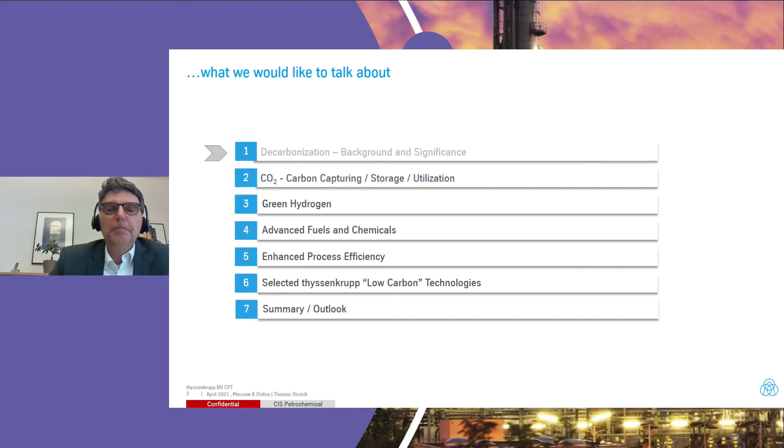If we look at the word decarbonization, there are a lot of keywords. There are many subject areas, but also a lot of different interpretations - synthetic fuels, carbon utilization, green hydrogen, green CO2, green components. There's a lot of interpretation, and I will try to make it somewhat clearer here.

If we look at the scientific facts, there are greenhouse gases like CH4, CO2, halogens, and nitrogen oxides. The heart of the issue is that the emissions plus the heat trapped in the atmosphere lead to global warming. On the right is a pie diagram of global CO2 emissions, showing that Russia and Germany are at least in the same range for emissions, while the biggest global emissions come from China and the US.

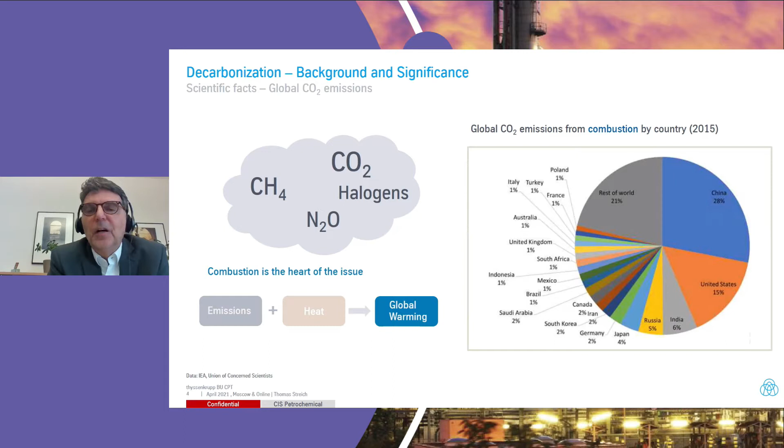If we look at the sources of greenhouse gases in Europe, the most part of emissions comes from fuel combustion - everywhere we have combustion of fuel, we have a lot of emissions. This is without the transport sector, where we also always have combustion. The transport sector is a quarter of greenhouse gas emissions, and the remaining part is agriculture, industries, and waste management.

If we focus on the transport sector, which is a quarter of greenhouse gas emissions, we see that the most part comes from passenger cars, and the remaining part comes from aviation, shipping, and rail industries.

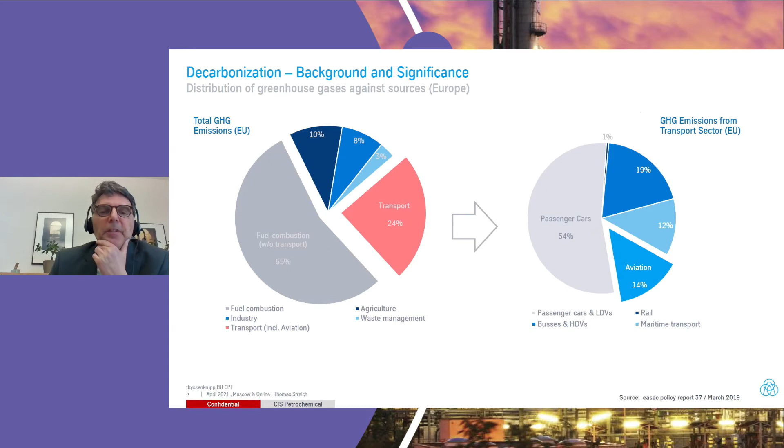If we look at the dilemma between the need to reduce carbon and the global energy demand, we see there is a dual challenge. Looking at the graphic, from 2016 to 2040 we will have a decrease in power needed, a decrease in building heating because of better buildings, and a decrease for passenger vehicles. But we will have an increase for road freight because of increasing transportation, an increase in aviation and shipping, and a significant increase for the petrochemical industry, especially plastics, plus a small part for others.

So in total we have an increase in energy demand, but at the same time we have to reduce carbon intensity or carbon emissions by more than 90%. If we do nothing, shown by the red line, we will increase greenhouse gas emissions, but we have the intention to follow the green line down to 2015 levels.

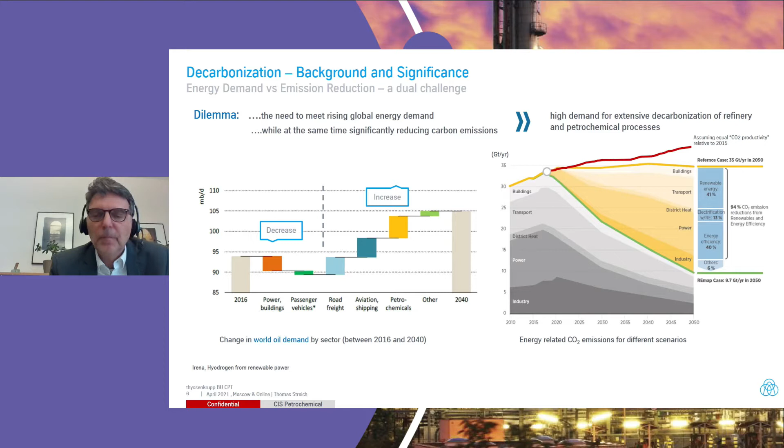If we try to understand the interaction between the refinery, the petrochemical, and the chemical areas, we can look at this simplified slide, though it's still complex enough. The refinery is represented by petroleum processing, which processes crude oil, and the petrochemical industry is represented by steam cracking. Most of the crude oil processed in the refinery goes to the transport sector and others - blending, lubricating, waxes, petroleum coke, as well as asphaltenes - and only a small amount, 15%, goes as intermediate products to the petrochemical industry.

In the next slide, this goes from the petrochemical to the chemical industry to produce the building blocks for the value chains - for example, ethylene and propylene, which can carry out all the respective products we have in the chemical industry.

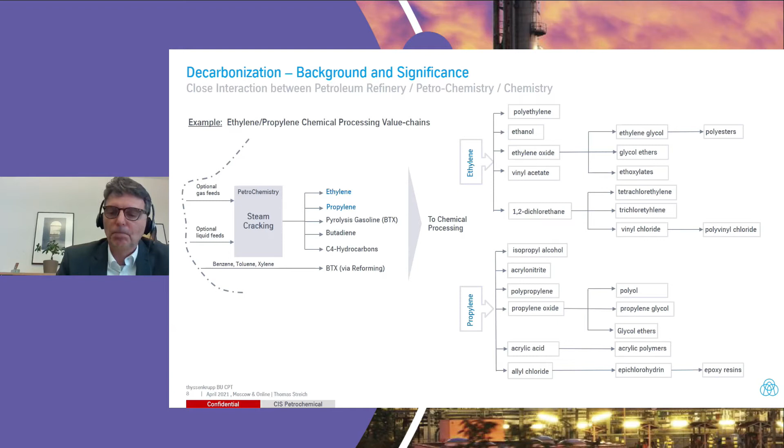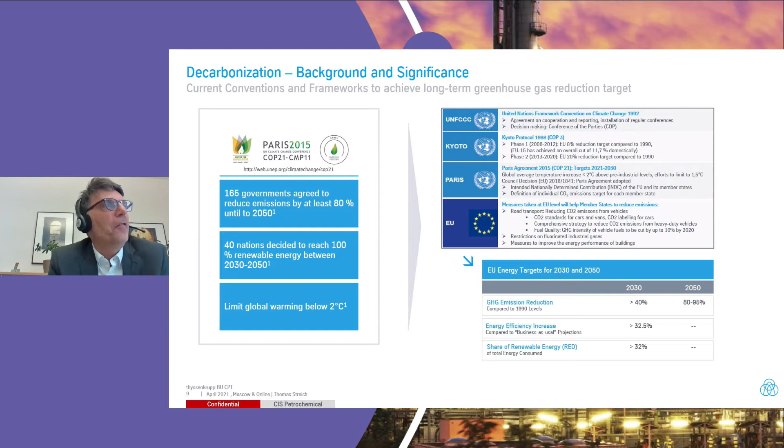What does this mean? There are a lot of regulations, which we heard about in the lecture just before. There's the Paris Agreement - I won't reflect on this in detail. We have some national regulations, and some further regulations, such as a plastic tax, which comes into force this year. All these regulations work as a kind of driver to decarbonize, to strengthen our efforts for a low carbon industry.

As we've seen from the slides before, it seems that oil and gas processing makes the beginning. But, and this is a very important point, is an ad hoc replacement feasible? If you look at the left picture on this slide, it's a very schematic picture of a refinery with products like fuel gas, LPG, gasoline, transport fuels, jet fuel, diesel fuel, and also light and heating oils, and residues like petcoke, bitumen, and sulfur.

For some of these products, there are lower greenhouse gas substitutes, derived in the table on the right. This means for transportation fuels, we are able to substitute electrical vehicles. We can use bio-based fuels, e-fuels, which I'll come to later. For fuel oils, we can directly use natural gas. For LPG, for building blocks, for chemistry, there are also substitutes which can replace fossil products.

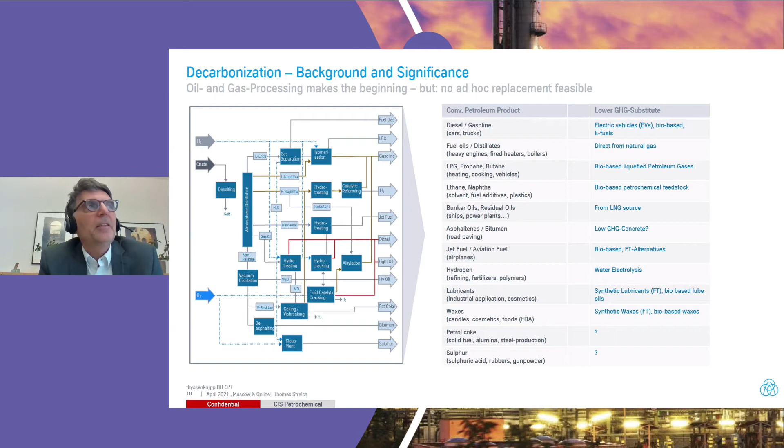But there are also a lot of components which are not easy to displace or replace with such lower greenhouse gas products. In such cases, we have to implement new pathways. We have to implement new interconnections between refinery, petrochemical, and chemical industry. That is what I want to focus on in the next slides.

Decarbonization, strictly speaking, is the wrong word, because we are not going to remove all the carbon. Carbon is needed for the chemical, for the refinery products - it's not going out without carbon. So we have to handle this carbon, and we have to handle it in a way that is sustainable.

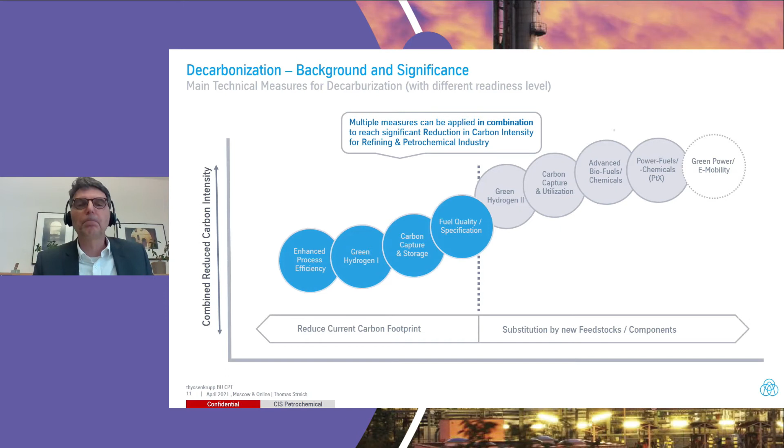Carbon capturing, CO2 - if we talk about CO2, we talk about a property, a component which has to be removed. But on the other side, carbon dioxide is a very valuable compound, and we should not abandon carbon. We should find the right balance between emissions, which cause global warming, and cases where we can use this carbon from emissions to make new products. So with this knowledge in hand, we have the targets for carbon capture and storage, and the target for carbon capture and utilization.

Capturing CO2 can be done from concentrated sources like industrial emissions, flue gases, which can be purified - this is much easier because they have high concentrations. It's much easier to remove CO2 from such sources. And we have direct air capture - not so easy because we have low concentration, and it's in any case very expensive today. But both capturing methods can be used for decarbonization.

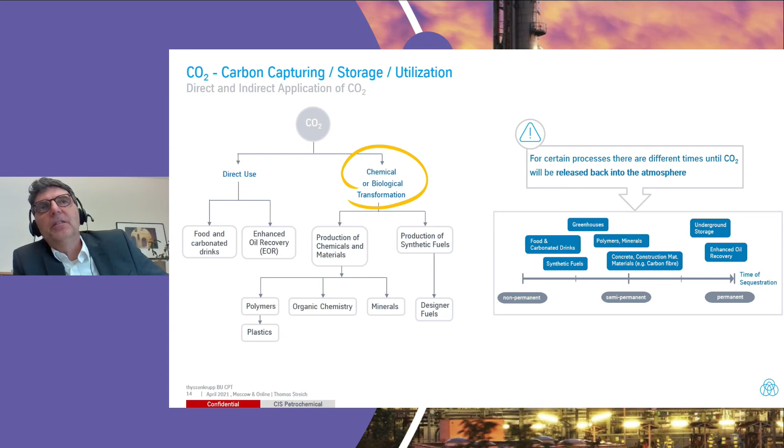If we look at synthetic fuels, where we use CO2 as part of the feedstock for producing synthetic fuels, we see that it's a very short time, because if this synthetic fuel is processed in an engine, an ICE engine, we will see a very short release back to the atmosphere. If we use polymers, minerals, or concrete making from CO2, that's a semi-permanent storage. And if we use underground storage, we have a relatively permanent storage. This is essential if we try to do life cycle analysis, and this should be mentioned in this kind of assessment.

Green hydrogen. Talking about hydrogen, hydrogen is a very important component within refinery and petrochemical. You see the industrial sectors: refining, chemical, and iron, steel, and other industries. For the refinery, a quarter, 25%, hydrogen is used for all the hydro treatments, hydro cracking units.

For the chemical industry, there's mainly polymers, ammonia, as well as the production of resins. And this is coming more and more for the iron and steel sector, where we are able to use hydrogen for iron production. This would be 10% here in this slide, but this would be much more in the next years.

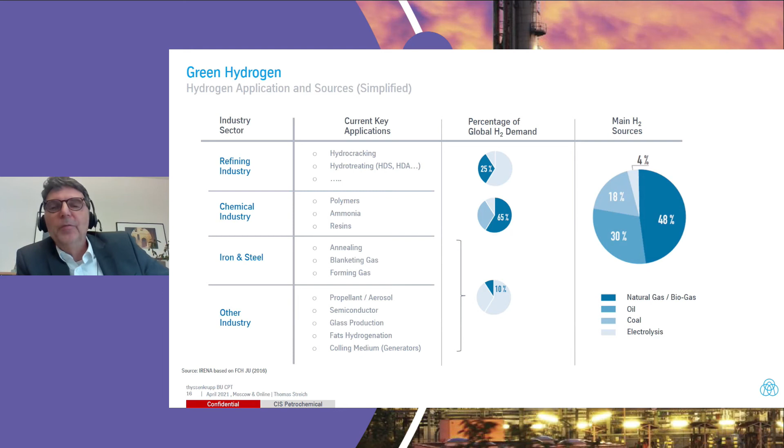If you look at the sources, hydrogen sources are mainly coming from natural gas up to now, then a part from oil and coal, and up to now there's only a very few or very low portion of hydrogen coming from water electrolysis, which will also increase within the next years.

Using green hydrogen as a renewable feedstock, we have on this slide the hydrogen route marked with a green color. You see that we can use hydrogen with electricity and electrolysis in order to make green hydrogen, and together with captured carbon, we can have a feedstock like syngas in order to have the products coming from them.

Hydrogen is classified into two main areas. We have gray hydrogen, which is normal or standard hydrogen coming from steam methane reforming, SMR. Then we have green hydrogen, coming from electrolysis, and we have a lot of options in between, because we can use it as a kind of bridge technology between gray hydrogen and green hydrogen.

This is the hydrogen which is made from steam reforming, but which is purified or handled with some treatment in order to remove the CO2 coming from the steam reforming process, by treatments and CO2 removal sections.

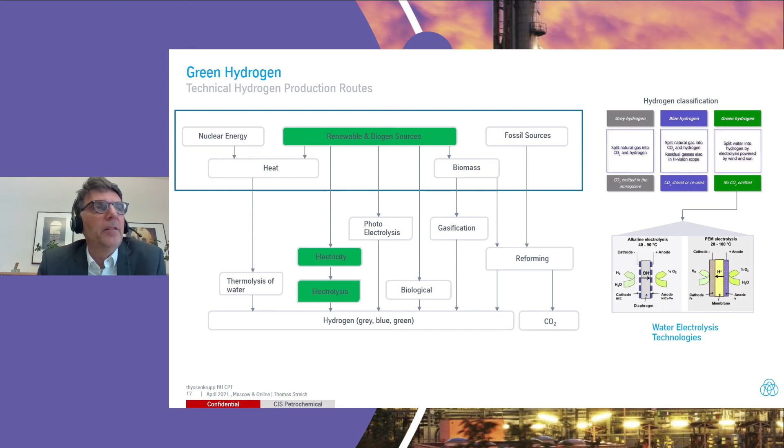With respect to water electrolysis, we can separate between several kinds of electrolysis. The most important is alkaline electrolysis as well as PEM, so-called PEM electrolysis.

This means hydrogen can act multifunctionally. Hydrogen can act to distribute energy. It can act as a kind of buffer to increase system resilience. It can help decarbonize transport with respect to fuel cells. It can be used as energy itself in the industry. It can be used as feedstock for all the power-to-X pathways, and it helps decarbonize building heating, because it can be directly used as a heating material.

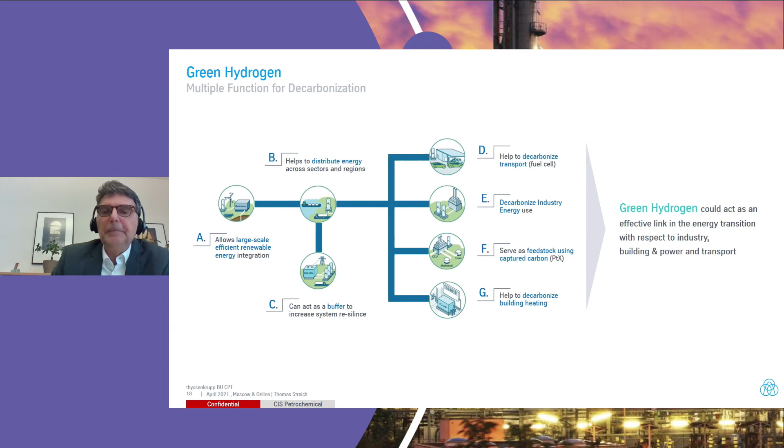So, advanced fuels and chemicals. Just a very short explanation of what the meaning is of advanced fuels and chemicals.

If you look at the biofuels and the biorefinery classification, we see that biofuels can be distributed into four generations: the first, second, third, and fourth generation. We are currently in the second generation fuels. This means that we can produce products from biogenic sources, not from edible plants, because we don't have the problem with edible material.

We are looking for 3rd generation biofuels, which are able to trap CO2 from the atmosphere, and also for the 4th generation. But just now we are currently in the 2nd generation.

We have to use some production routes, some value chains like biochemical and chemical conversions, and other listed conversion and production methods and processes. On the other side, we are able to get energy from bio sources.

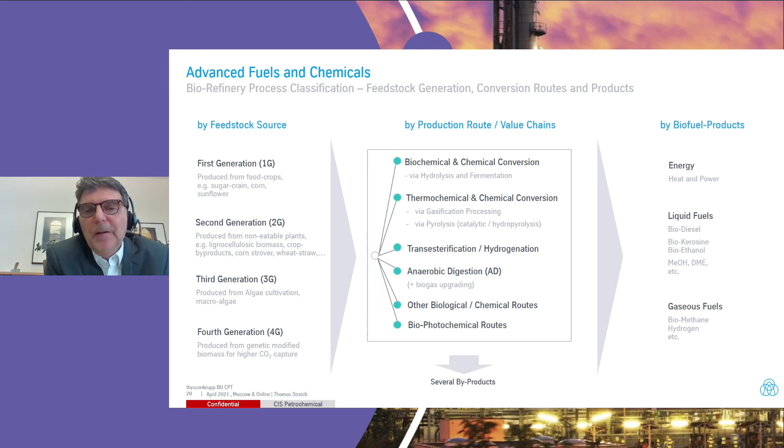We get all liquid products, transport as building blocks, and we can also gain gaseous products from it. This is the biofuels. If you look at the advanced fuels with respect to synthetic products,

they are starting with the syngas. We need syngas production. This syngas production can be done with solid, liquid, or gaseous feedstocks, which are not at all very sustainable, because if we make it from coal or from oil, that's not the way we are going to.

But if we use biomass gasification or waste gasification, it should be a kind of sustainable pathway. Or, at the left side, at the bottom,

we can use new and advanced resources like CO2 reforming, water electrolyzers, or hybrid systems using electrolyzers with biomass gasification.

The synthesis gas coming from this production route is essential with respect to the hydrogen to CO ratio, and this is different for the different production routes. So we have some adjustment syngas condition and purification steps in order to adjust the hydrogen to CO ratio.

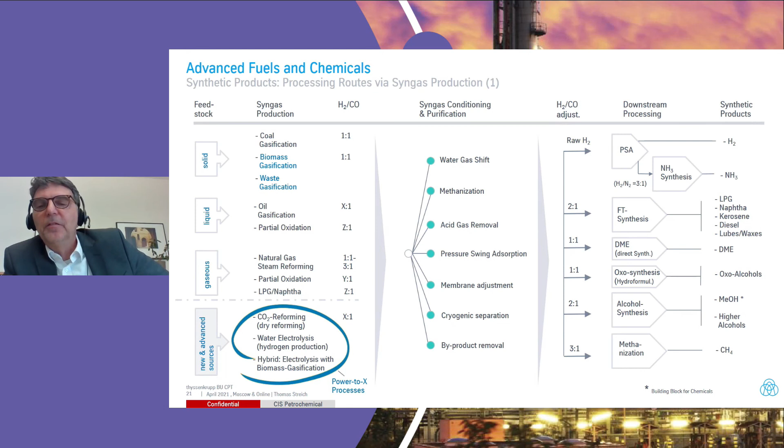And you see at the right side, the adjusted ratio can be used for all downstream processing, like for alcohols, for fuels and oxo alcohols, as well as for methanization steps, and so on. This means that if we use advanced fuels and chemicals, the so-called power to X fuels, we see that...

Okay, thanks. So let me just say there are a lot of pathways coming out from power to fuels, which can be done for all the products we need.

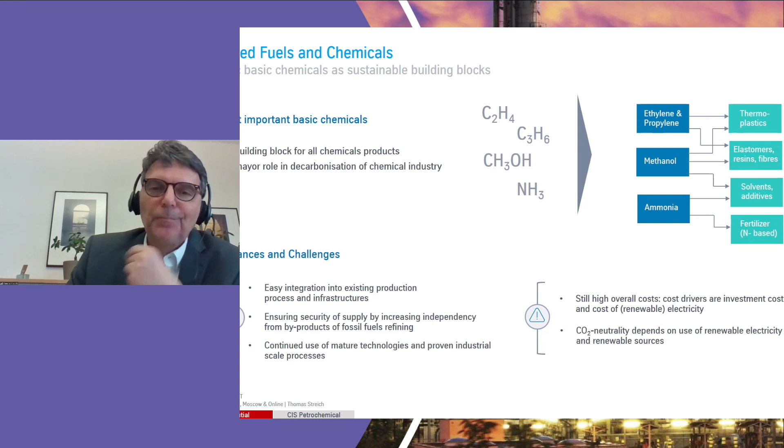This means that all the chemicals and all the transportation fuels can be gained from these new and sustainable feedstocks. A very short review on enhanced process efficiency: I won't go into detail, but it means we have better energy plus carbon management and control, the ability to benchmark, the ability to calculate emissions in order to see what is the improvement, what is the current state, and what is the future one. And we have the big area of circular economy and material cycling, shown at the left side, as well as digital expertise and artificial intelligence, which helps make the processes more efficient.

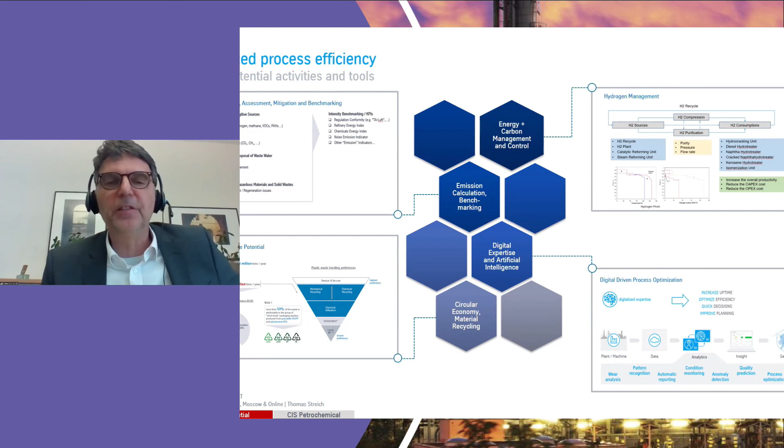Let me give, at the end of the lecture, a few examples of technology areas where thyssenkrupp is involved. There's green hydrogen, which we are very familiar with. Then we have green methanol as a building block for the components I've just mentioned. We are also involved in many Carbon2Chem projects which use carbon from other industries to make new products. And we have the ability for dedicated decarbonization services, meaning all kinds of decarbonization excellence for carbon emission benchmarking, green revamps for existing installations, and so on.

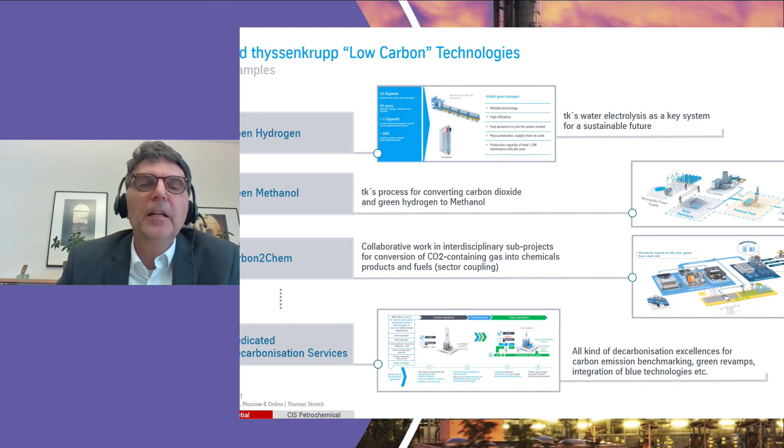Let me finalize my lecture with some points. There is a dual challenge: rising global energy demand on one side, and significant reduction of carbon content on the other side. We have very strong interactions, as shown, between the refinery, petrochemical, and chemical industries. There are a lot of proven technologies available and pathways which have to be implemented.

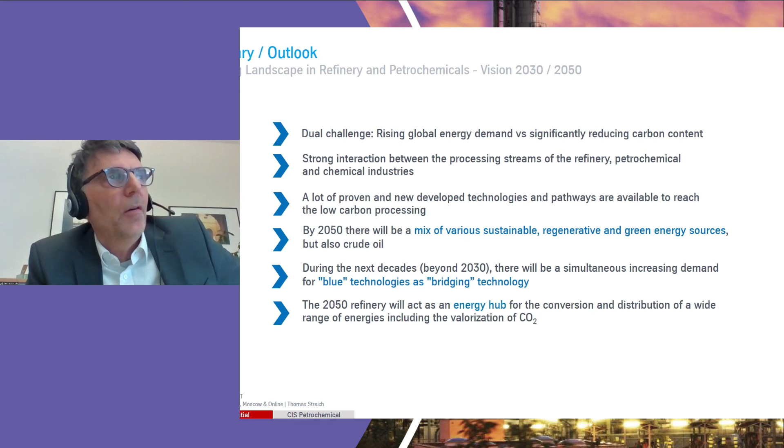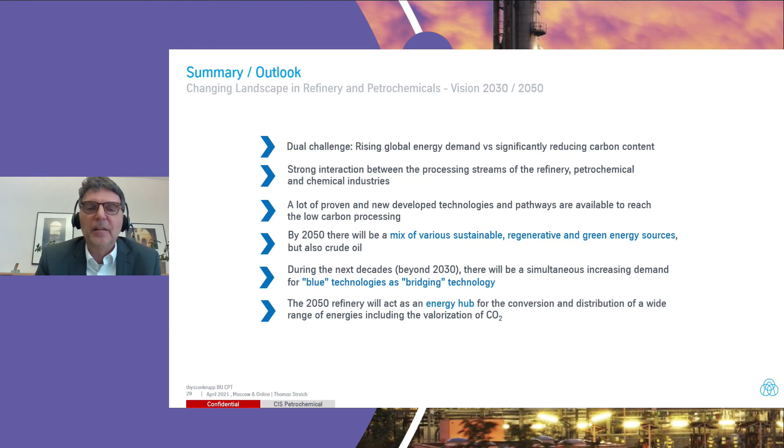By 2050, there will be a mix of sustainable, regenerative, and green energy sources, but also a little bit of crude oil. During the time beyond 2030, there will be a lot of bridging or blue technologies which will have to cover the transition to green technology sources. And the refinery will act in 2050 only as a kind of energy hub. So thank you very much.

A very essential message is that we can only achieve these smart solutions for climate protection if we work through cross-industrial networking. Thank you very much.